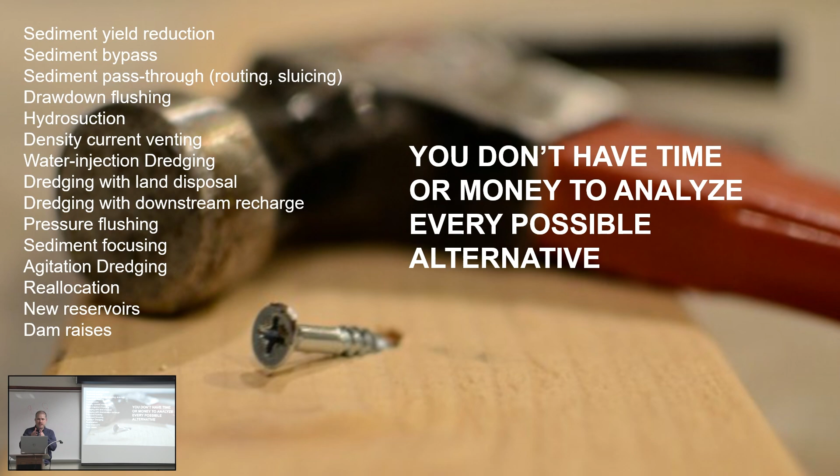And as you kind of gathered, we've sort of focused this workshop on you're in a planning stage of your study, not necessarily in a design or implementation, but in a planning phase, which is where everything is since we're not really operating this way right now. So if you start out with this whole list and you just want to get down to a smaller array of things to look at, how can you screen? And here's just going to get right into it.

So two big questions to start with. Is your sediment contaminated? If you don't know, then you have to go do some samples and find out if it's contaminated. If the answer is yes, it's a whole different set of considerations, a whole different set of options, and they're all going to be very expensive, okay? So you have to know that. If the answer is no, then you can continue on to the next set of questions.

The next question is, can the downstream channel, with any level of reasonable constraints, accept sediment? Sometimes, and historically, there's been like a knee-jerk reaction to say, oh no, you can't put sediment in a river. And that's not true. We have put sediment in rivers all over the country. It's a permitted activity. It's not a forbidden activity.

And there may need to be education of the stakeholders. You might need to do some research. There might be a process to get people to yes on this, but it may not be an actual physical, logical reason to say no, right? It might be fine as long as you can build enough consensus around it.

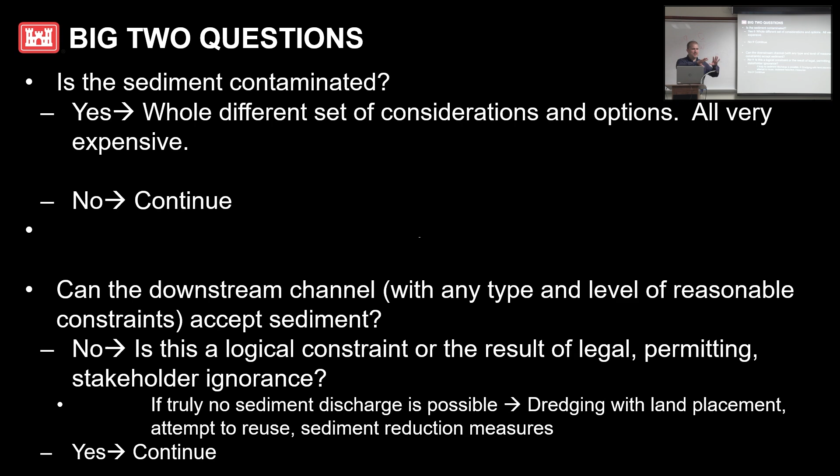So if it's truly a no, then you are left with dredging, with land placement, and hopefully attempts to reuse the sediment for something beneficial and trying to reduce the sediment coming in. But if it can be yes, even if there's constraints you can operate within, then continue on to the rest of these screening questions. I think I'm going to get this written out as kind of like a flow chart that someone could follow.

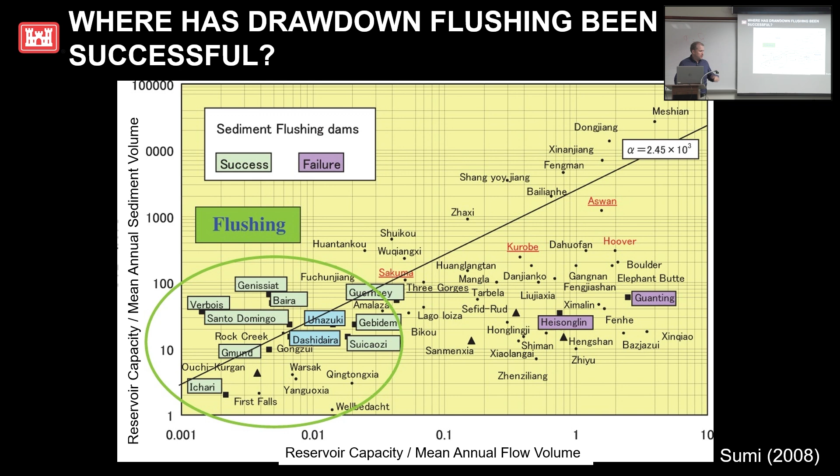So this was a plot by Sumi, who is in Japan and has done a lot of work on reservoir sedimentation in Japan. Various other people have taken that same concept and plotted different lakes and tried to put on, well, what are the options that people are using, or what are the options that they might be using based on professional judgment of the person making the graph. So this plot was made by George Annandale, who has a lot of experience in multiple countries looking at reservoir sedimentation.

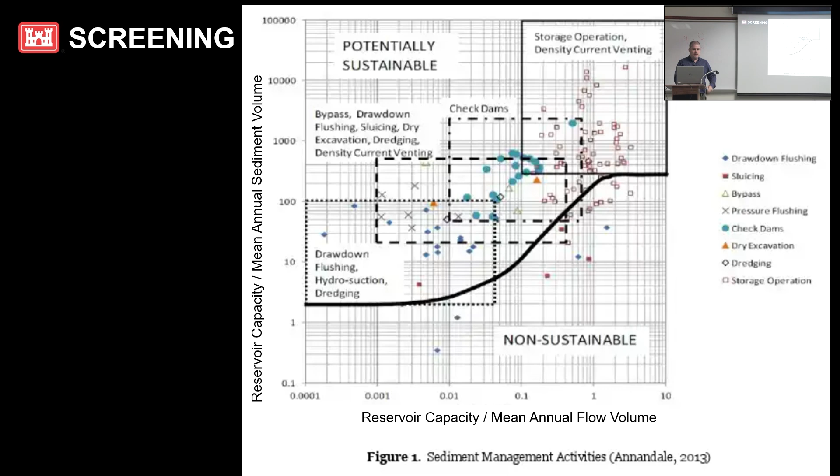But then, similarly, as you get down into this range, you get into your flushing operations. So this graph can be helpful. You can plot where your lakes fall and see what George Annandale says are the likely options based on what has been done in other places. This graph, I believe, was made by Tim Randall, who's now retired, but from the Bureau of Reclamation. And it's just kind of simplifying, but it's based on the same data.

And sluicing would be in this range. So that's that routing where you do partial drawdown and try to pass the sediment through. Flushing, down in this range. And the dots there are lakes from Kansas that Chris Gnau, who was of the water office at the time, plotted. So those are based on those fact sheets, so the data is a few years old now.

But several lakes in Kansas plot in that sluicing range, and then several lakes plot in that storage range, as to what people traditionally do. And Tuttle Creek Lake was sort of right on the border there of being in the viable, you could say, range for sluicing.

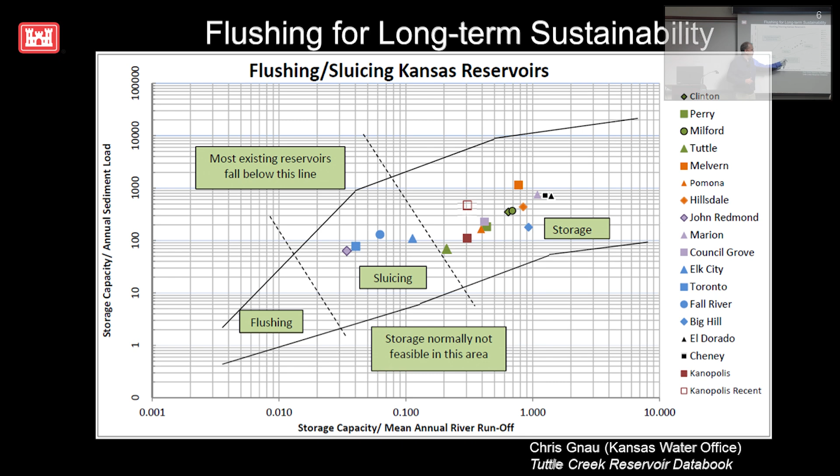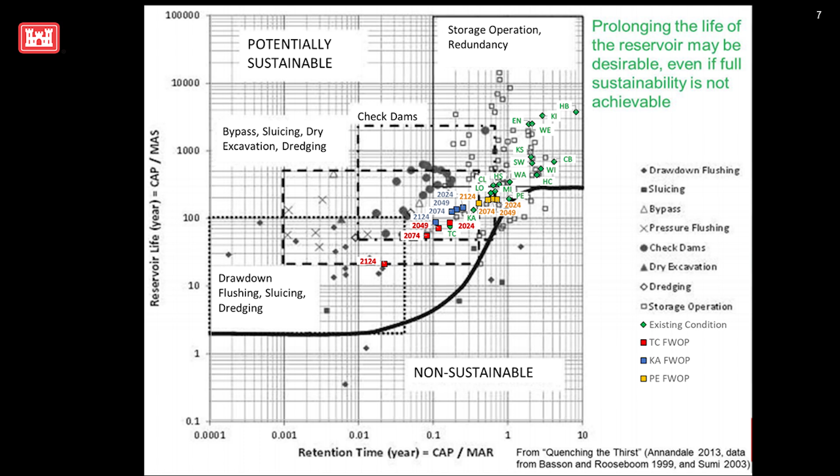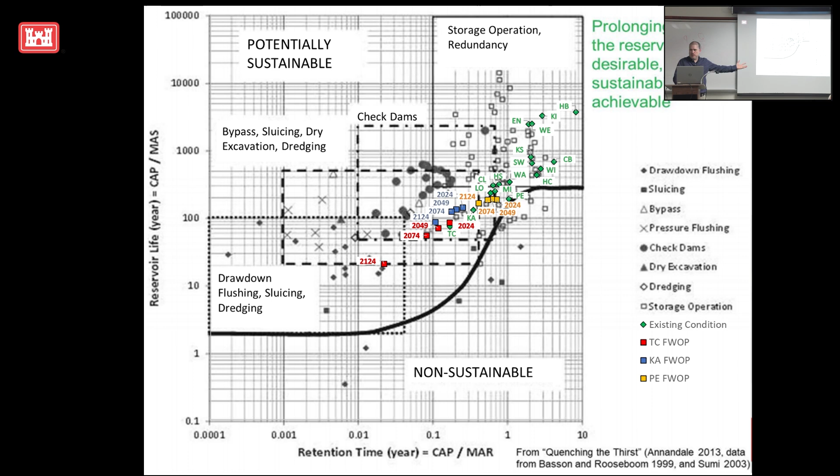One issue I have with all these kinds of plots is they're often trying to say, what could you do to be 100% sustainable? And maybe that's very difficult to do with a large lake. You could do it, but maybe people aren't willing to spend the money that's required. But you could still prolong the life of your lake and make this descent into smallness take longer, just by implementing some of these things. So just because it doesn't show up in the right box doesn't mean you couldn't do it and it might not be beneficial. Okay.

So for drawdown flushing, I would plot it. Where does it plot in this graph? And do that Atkinson analysis that Travis showed us. Very easy to do, right? That was pretty simple. And you can see how effective it is. Oh, first question before that, though, is do you have gates at or near the bottom of the lake? If you do, then you do these other things. If you don't, then you can move on.

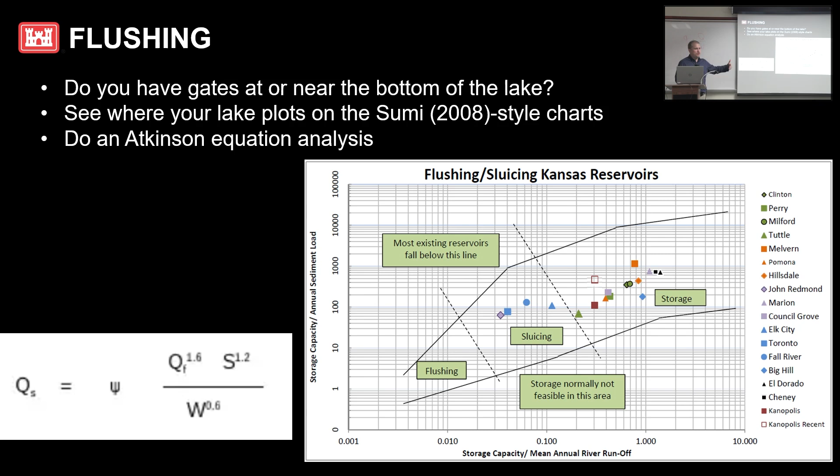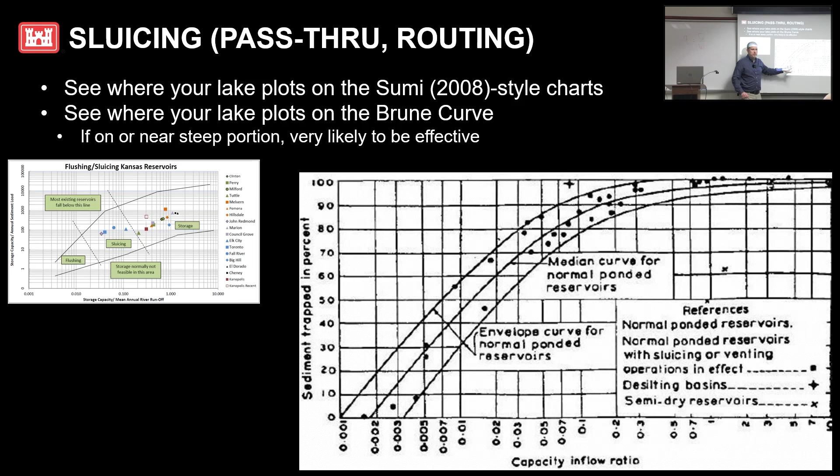Sluicing. So with sluicing, you can see, again, where does it plot on this graph, as well as where does the trapping efficiency plot on your Brune curve. If you're way up in this flat region, then you're going to have to draw down quite a bit to get hardly any benefit. If you're on the steep region, then drawing down a little bit might give you a big benefit. So that's kind of a screening tool.

Hydrosuction. Do you have unused or rarely used conduits, water supply lines, or drawdown gates? And I've said this before, at some of our lakes, we have emergency drawdown gates. They're not service gates, but they're there just in case we need to drain the lake. Those could be repurposed for passing sediment. Other lakes have old water supply lines that were used at one point, but they're not being used now, et cetera. So, just how could water possibly get from one side of the dam to the other? Could any of those be retrofitted in order to pass sediment as well?

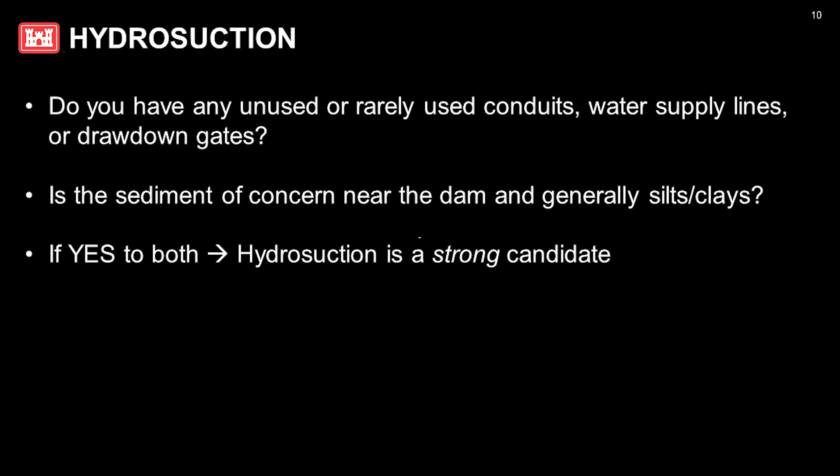And then, is the sediment of concern near the dam? Is it generally silts and clays? So if the answer is yes to both, hydrosuction is a strong candidate.

Water injection dredging. Do you have discharge gates at or near the bottom of the lake? Is the sediment of interest near the dam and fine? Paul has left, so I don't remember what he said that limit on liquidity index was. 1.8. Okay, good. Everyone took good notes there.

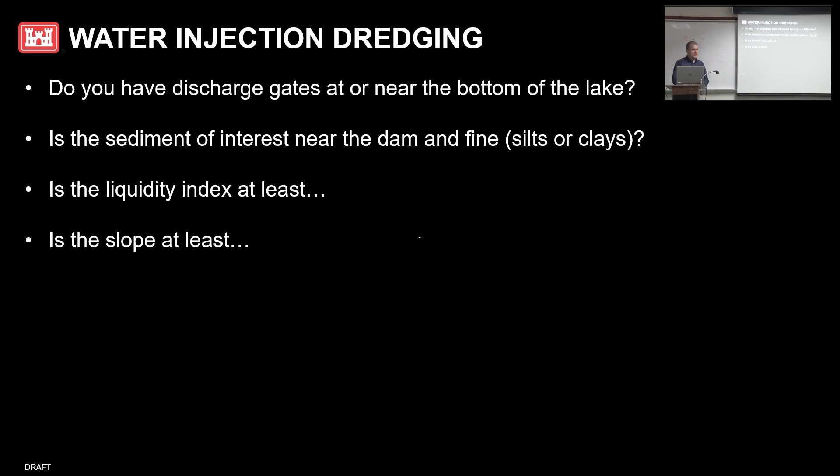Dredging with downstream discharge. So anywhere that those first two big constraints are satisfied, it's not contaminated and the channel downstream can accept sediment, you could do dredging and discharge the sediment downstream. There are some cases where it would strongly lead you in that direction off the get-go, and that is if you have very stringent environmental sediment release constraints.

So, for instance, I can envision places where the environmental community and the water treatment folks downstream could say, if you release during high flows, it's totally fine. You know, there's going to be high turbidity anyway, and it's going to be diluted by lots of water, but only during high flows. So you would need to get a lot of sediment out during high flows, and you'd have a hard time getting that much probably by these other methods.

If they say, oh, you can release, but only the fines because we don't want anything to settle out. Or you can release, but only the sands and gravels because we consider that habitat and we consider the fines a pollutant. So there could be a lot of things where, with the control you can get from traditional dredging, you could satisfy those.

Okay. Or if the sediment you're trying to access is too far away to get it via hydrosuction, even though you've got some conduit you could pass it through, it's just too far away. Then you would want to do this. You could hook up your dredge pipe to that low-level conduit and still take advantage of the head, but you have to add extra power to it in order to transport it that distance.